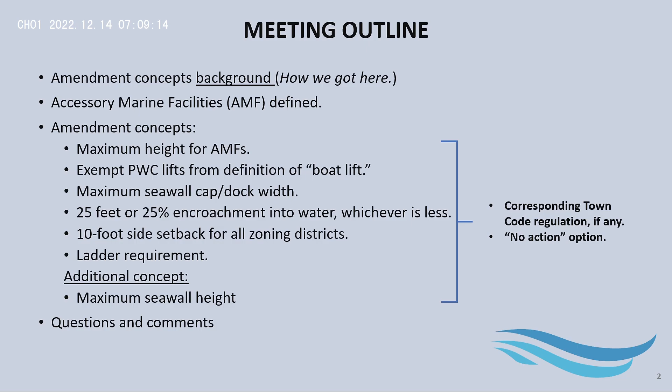All right, so here's the background. Again, this is how we got to these meetings today. So back on November 17th of 2020, the Town Commission authorized the Vice Mayor at the time, Greg Babij, to sponsor a review and propose amendments to the accessory marine facility regulations.

Now, I looked at the meeting minutes for that November 17th meeting, and Mr. Babij had indicated that both Boca Raton and Pompano Beach have clean ordinances in terms of their accessory marine facility regulations, and he also suggested that some municipalities are moving towards a box type or 3D box type concept, and I'm going to delve into this box concept a little bit later.

On March 15th of 2022, the Town Commission considered an introduction to the proposed amendment concepts. This was presented by Mr. Babij. The consensus from the Commission at this meeting was to establish a process for review to include public participation.

Now let me add, between November 17th of 2020 and March 15th of 2022, staff met with Mr. Babij. We also brought in the town's marine expert, which is ATM. We have a professional services agreement with them for marine consulting. So we had met with them to discuss these amendment concepts, to analyze them, etc.

On April 19th of 2022, the Town Commission established a process for review of amendment concepts to include the creation of maps of the various canal and lake widths. This was completed. And they also asked that the Planning Board physically observe the canal and lot widths and the existing accessory marine facilities. This was also completed. In May of this year, I actually accompanied each individual Planning Board member, those that didn't have access to a boat, on the town's marine patrol vessel.

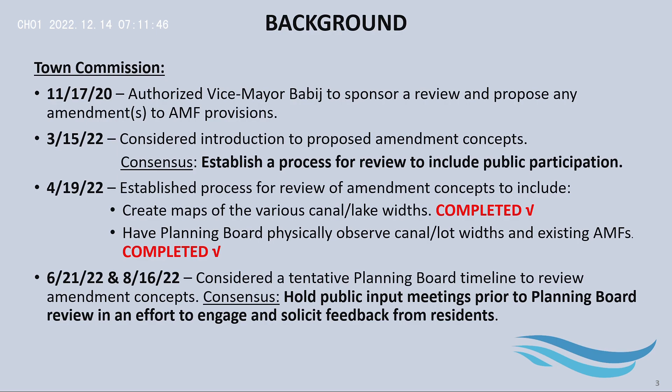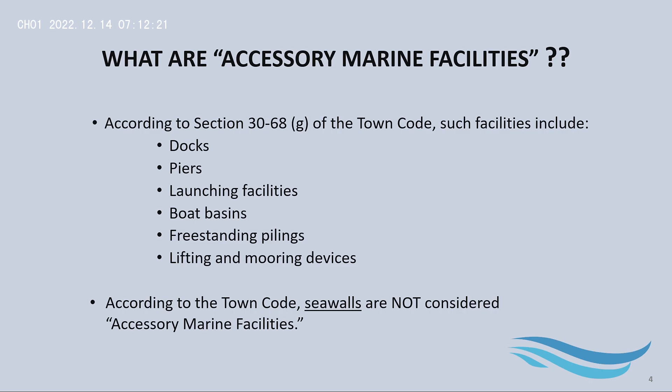Okay, definition of accessory marine facility. So section 30-68G of the code describes what an accessory marine facility is. It's a dock, a pier, a launching facility, a boat basin, a freestanding piling, or lifting and mooring devices. Now, the way the code reads right now, seawalls are not considered accessory marine facilities. The regulations for seawalls are not in this chapter 30. They're governed by chapter 6, so they're not considered accessory marine facilities as the code reads right now.

Okay, so this is our first amendment concept. And the amendment concept is a maximum height for accessory marine facilities. This is the acronym you'll keep seeing, accessory marine facility. And the proposed height is, this stands for base flood elevation plus 7 feet. Now, I've put together a little diagram here to help explain base flood elevation for those of you that are not familiar with the term.

This is a very simple diagram. So here you have the flood. This is represented by blue. The red dashed line is the base flood elevation. So we have different examples of homes here. So if your home is built below base flood elevation, you could see the risk for flooding is quite high.

And let me just give you briefly a definition of base flood elevation. It's the anticipated height of floodwaters during a 100-year flood. It's basically a 1% chance of getting flooded each year, okay? Now, if we go to the home in the middle, this home is built at base flood elevation, so you could see less risk for flooding, right? And then if your home is built above base flood elevation, obviously your risk of flooding is much lower, okay?

Now, what does the current code say about a maximum height for accessory marine facilities? It says nothing. There is no maximum height right now in the code. What the code does state is that for boat lifts, the lifts cannot be higher than the superstructure of the boat when lifted. I've bolded that definition for you. It doesn't say how high the lift can be. It doesn't give a number, right? It doesn't quantify it. But the lift cannot be higher than the superstructure of the boat.

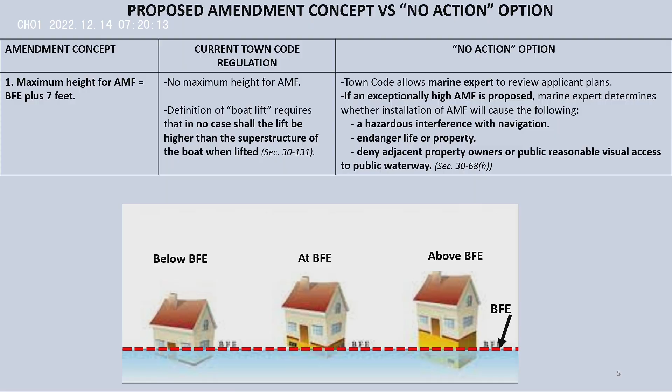So this is to exempt personal watercraft lifts from the definition of boat lift, or just remove the requirement from the code. So here's that definition of boat lift again. Again, I've bolded that part that talks about the lift can't be higher. Even though, as I said, a lot of the personal watercraft lifts that we see, they're specifically jet ski lifts, is what we've seen in the last 3 years. Even though they're a jet ski lift, they're still considered a boat lift, and they have to comply with this definition. However, a lot of the jet ski lifts have a very low profile.

So in this case, this property owner, not only do they have to go to the planning board to get an approval for the boat lift, but they went for a variance to the Board of Adjustment and Appeals. They showed a hardship, they had to comply with additional criteria, and the Board of Adjustment and Appeals did go ahead and approve it, but they had that extra hurdle, right? They had to pay an additional application fee, and they had to wait more time. So this is why we like to get your input. Should we just, again, exempt them from the lift, given the low profile, or not?

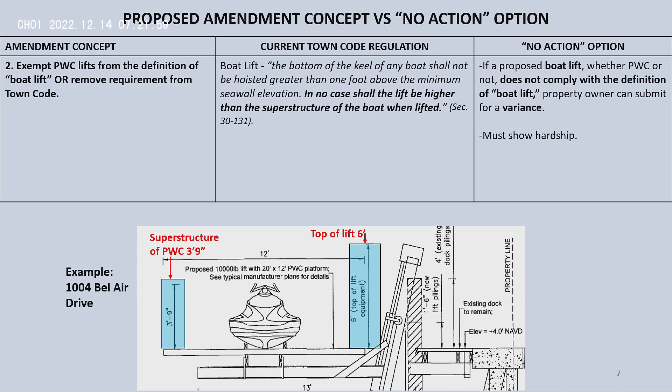The no action option, for any boat lift, whether it's a personal watercraft lift or your traditional boat lift, if you can't meet the definition, right now you have to redesign your lift or you go for a variance, which is an exception to the rule. And again, you have to show a hardship and there's other criteria.

Okay, next amendment concept, we're halfway through, is a maximum seawall width of 3 feet and a maximum seawall plus dock width at 8 feet. This is proposed to be measured from the property line. Now, what does the current code say right now? The current code says that in waterways that are regulated, and this acronym stands for the United States Army Corps of Engineers. And let me add that all the waterways, the Intracoastal Waterway, the canals, and the lakes that are within the town of Highland Beach, Army Corps of Engineers regulates all of them. We actually met with Army Corps in March of 2020, and they confirmed that that is the case. So what the regulation currently says is that if Army Corps approves it, you're good to go. That's good enough for Highland Beach.

Okay? When you propose or want to install a boat lift, a seawall, you have to get approval from the Florida Department of Environmental Protection and the Army Corps of Engineers, just to give you a little bit of clarity there. Now, I provided here a list or a little table of the seawall widths and dock widths that we've seen come in. Again, to give you a little bit of perspective, these are as of January of 2020. So the seawall widths that have come in, you could see they're all at 3 feet in width. That's pretty common. Dock widths, we have some at 5, some at 4. We had one at 8.

Okay. Now, the no action option here. Again, if the town decides not to move forward with a maximum seawall width or dock width, and let's say we had a really wide dock come in tomorrow, out of the norm, we would go ahead and have the marine expert come in, again, make sure that that dock is consistent with the criteria. And again, as I said earlier, they would provide a report.

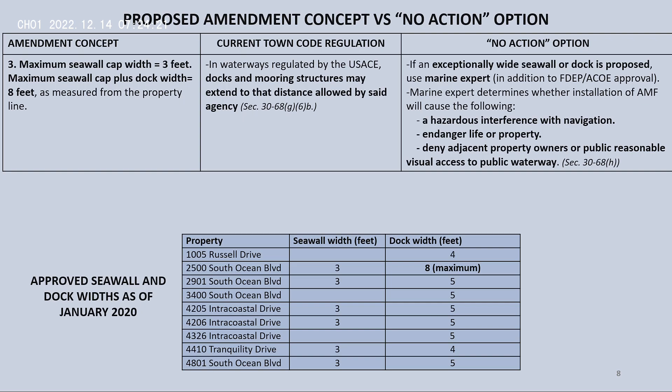Now, if we had an exceptionally wide seawall, these criteria don't apply to seawalls because these criteria are specific to accessory marine facilities, right? But that's not to say if we had a really wide seawall come in, if the marine expert felt that that wide seawall would endanger life or property or was a hazard or interference with navigation, they would have every right to document that in the report. They're the marine expert. They would make that determination.

Okay. Next amendment concept. This is that accessory marine facilities can encroach into the water 25 feet or 25% of the waterway, measured from the property line, whichever is less. And what the current code says is what it says for the previous amendment concept. So long as you have Army Corps approval, you can encroach as much as you like. Highland Beach has no further regulation. Okay? So if somebody comes in now with a boat lift, I make sure that they have the approval from Florida Department of Environmental Protection and Army Corps.

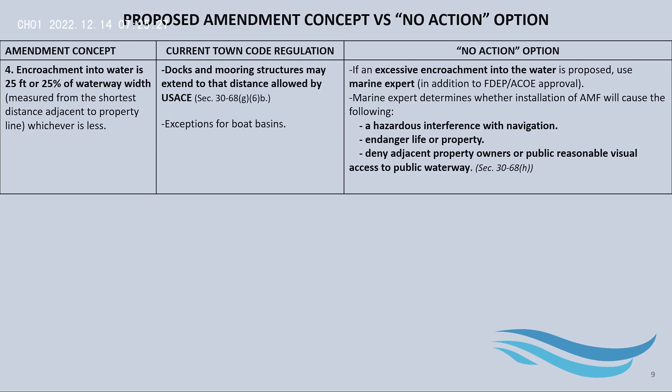If they have the approval, there's nothing else in the code for me to tell them. They have the approval. Now, I'm going to show you some maps, but let's just quickly look at the no action option. So if we don't move forward with this amendment concept, and let's say we had a boat lift and a dock come in tomorrow that's excessively encroaching into the water, marine expert, right? We bring in the marine expert, and they determine whether that boat lift is going to comply with these regulations.

Okay, let's look at some maps now. Let's look at the reality on the ground. So we're going to look here at this encroachment, 25 feet versus 25%. We're now looking at the north side of Boca Highlands. Now, I've taken a very rough measurement. All the measurements I'm going to talk about are rough measurements, so don't hold me to them. I'll be talking about and highlighting certain properties. I also want to mention all the properties that I will reference are randomly chosen, so I don't have a vendetta on anybody. Okay, so the width here of this canal is approximately 77 feet.

So 25% of 77 feet is 19.25 feet. So if this amendment concept gets adopted, and this property wanted to put another boat lift, they could only encroach 19.25 feet, because it's the lesser of the two. Now, the 25-foot measurement, I put it here just for your reference. It's right to the end of this green dot.

That's 25 feet, okay? Now, a little side note, I put a dashed circle around this boat just to give you a little bit of perspective as we move forward. This is a boat that's currently moored at this property. It's not on a lift, it's just moored. Now, the code allows boats to be moored, and the only regulation the code states is that you have to be within the property line, okay? So this boat can be as long as it wants to be. The only regulation is that they stay within the property line.

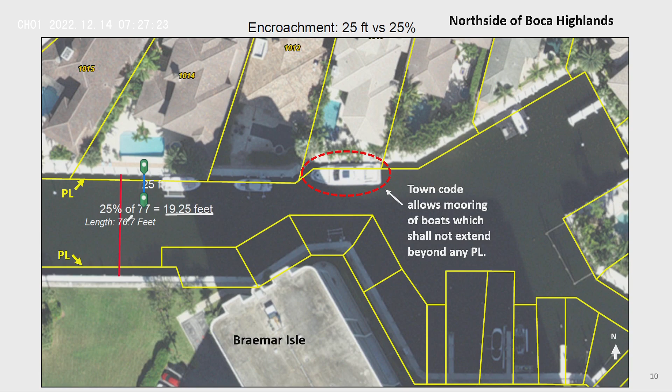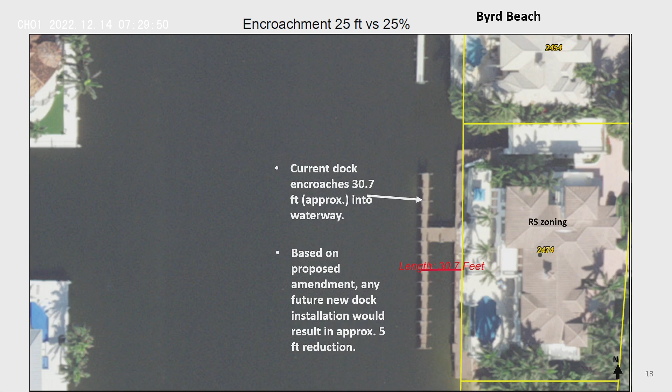If the amendment concept does get approved, do we want to exempt perpendicular docks that are along the Intracoastal Waterway? Do we want to exempt everyone on the Intracoastal Waterway from this 25 feet? The code does allow perpendicular, you can have a perpendicular dock. So we, again, would like to get your input on that.

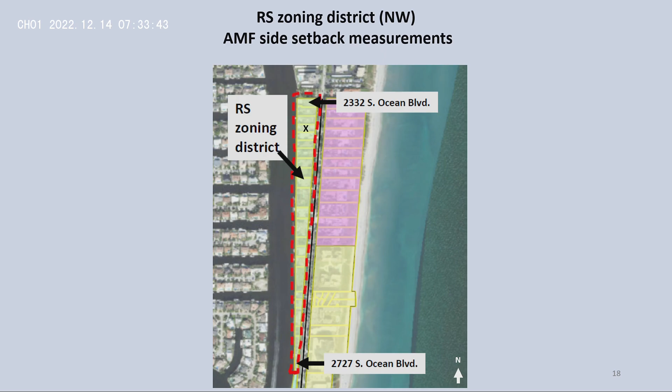All right, let's look at some setbacks. This is a residential single-family zoning district. We're going to look at this home right here, marked with an X. This is 2352 South Ocean Boulevard. Okay, so here we're looking eastward. This is their dock, okay? Now here's your north arrow. We're looking at the same dock.

We're just looking right above it. We're looking from above. Now, right now, their current side setback from the dock is approximately 21 feet. So it looks like they may be legal nonconforming because they're supposed to have 25 feet, okay? Don't hold me to it, but it looks like they may be legal nonconforming on the north. On the south, they have 28 feet, so that's conforming.

Now, if the amendment concept gets approved, their lot width is 80 feet. The amendment concept says it's 10 feet or 10% of your lot width. So 10% of 80 feet is 8 feet. So the blue line represents the 8 feet right here, okay? This is the 8 feet. So if the amendment concept gets approved, they could expand the dock to that blue line on the south and expand it to the north to that blue line right there, okay?

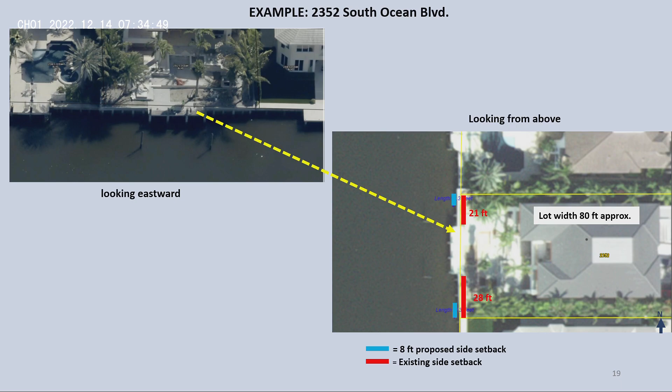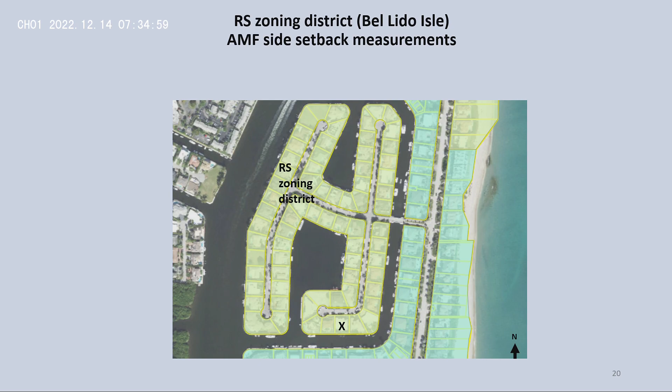Let me show you some more examples. This is also a single-family zoning district. This is Bel Lido. Right now, again, you have to have 25 feet side setback. We're going to look at this property right here on the X. So this is on the canal. This is 4426 Tranquility. We're looking northward. Here's their dock. We're still looking northward. Here's your north arrow. The lot width is 100 feet.

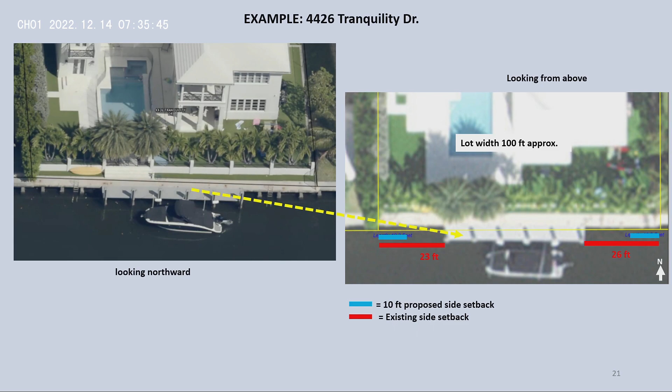So if the amendment concept gets approved, they could extend their dock to that blue line on the east side and extend it this way to the west. You can add a boat lift right here. Right now, they can't add a boat lift here. Right now, they cannot. Okay?

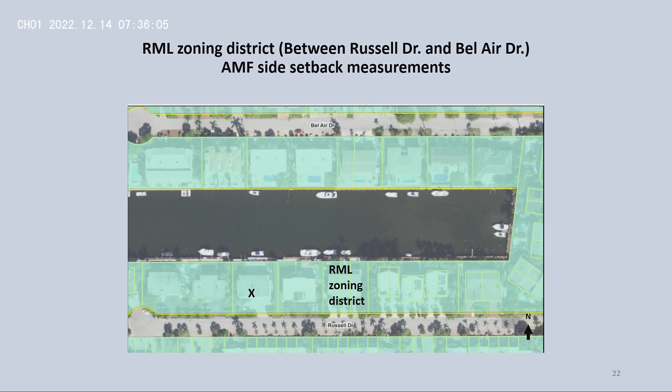Now, let's look at some multifamily zoning districts. If you recall, multifamily zoning districts, you don't have to have any side setback. But the amendment concept says you do. So let's look at that. This is the canal between Russell Drive and Bel Air. We're going to look at this property right here. This is 1019 Russell Drive. This is looking southward. This is their dock.

So right now they have 18 feet on the west side. Here's your north arrow, to give you perspective. On the east side, they have 5 feet. Now, the lot width is 100. So if the amendment concept gets approved, they're going to have to provide 10 feet on each side. On this east side, they currently have 5.

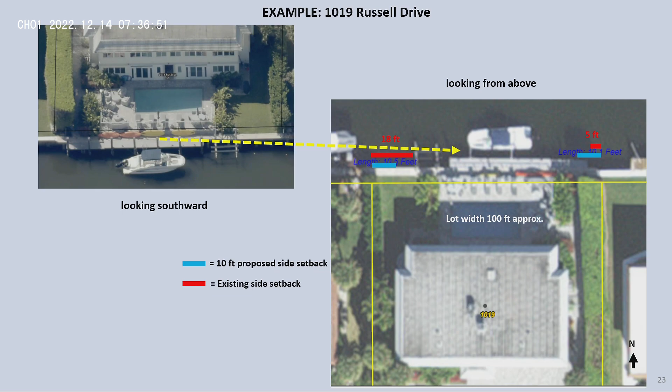So if this dock starts to fall apart, and again, the amendment concept gets approved, and they're going to install a new dock, it will have to be 5 feet shorter, right? They have to provide 10 feet. They only have 5 feet right now, so their dock would shrink. It would not be as long as it is right now, if the amendment concept is approved.

Well, guess what? If that dock falls apart and the amendment concept is approved and they want to go ahead and install a new dock, they're going to lose about 5 feet on this side and about 3 feet on this side.

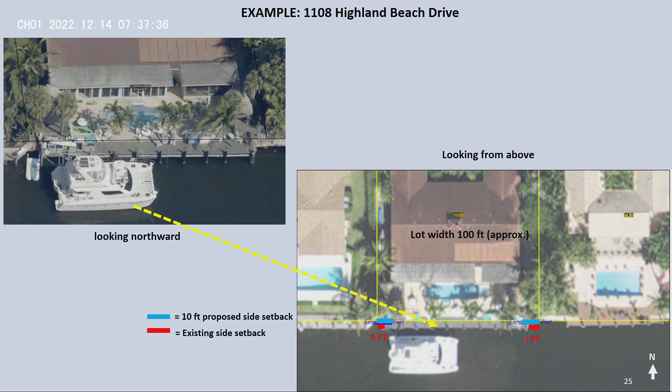Now, I have a few slides here that show the 25-foot encroachment and the side setback together. Okay, so we're looking at the Byrd Beach area. This is along the Intracoastal here. This is that northern part of the town. This is a single-family zoning district. The lot width is 100 feet. So the amendment concept says you'd have to provide a 10-foot setback.

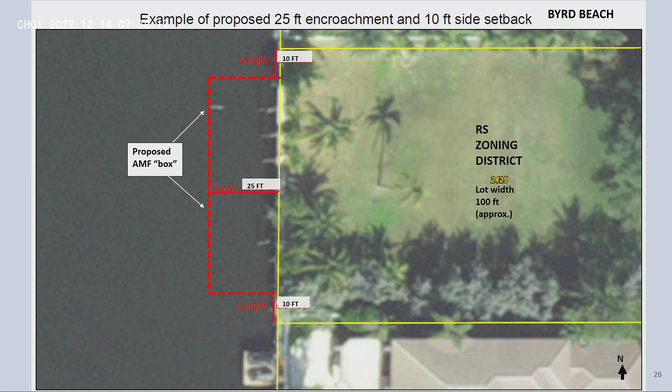Right now, it's 25 feet; it would be 10 foot on the north, 10 foot on the south, and then a 25-foot encroachment, right? Because they're on the Intracoastal, 25 feet will be the encroachment. Here's that box that I was talking about. This is the box. So within that box is where you can put your dock, your boat lifts. Okay? Let's look at another example.

This is Bel Lido Isle. This is the Intracoastal here, a single-family zoning district. The lot width is 100 feet. Based on the amendment concepts, you'd have to do a 10-foot side setback to the north and to the south. And because it's on the Intracoastal, the encroachment would be 25 feet, which is marked right here. And then the red dashed line is that box. And within that box, you could put your lift here, your dock, or what have you, another lift on this side. Again, right now, you'd have to be 25 feet on each side.

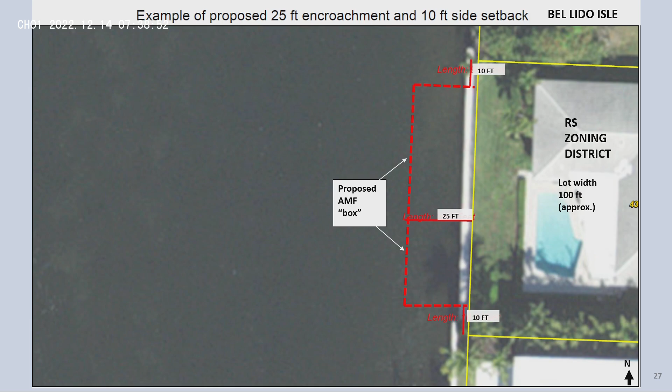And then let's look at a multifamily zoning district. Remember, multifamily right now, you don't have to have any side setback. But with the proposed amendment concept, you will. This property has a lot width of 45 feet. So the amendment concept says either 10 feet or 10%. So 10% is 4.5. However, the amendment concept says you have to have a minimum of 5 feet. So I provided the 5-foot setback here on the south. Here's your north arrow. And then 5 feet on the north.

The width of this canal is approximately 75 feet. 25% of 75 feet is 18.75 feet that you could encroach. So here's the 18.75 feet. And the red dashed line represents that box. And this is where you could put your boat lift. There's one already here. You could put maybe another one here. Okay? Yes.

Well, this one doesn't have the property line in the waterway. No. Oh. Okay. It's going to go through the box. That's true. And I think one thing what I'm seeing is you have to take into account the extended property lines. I agree with you, but just for conceptual purposes, right? Right, and again, there's so much nuance in the town, but I get what you're saying. No worries. I totally agree with you, but keep the concept, right? Right, got it. I appreciate the comment.

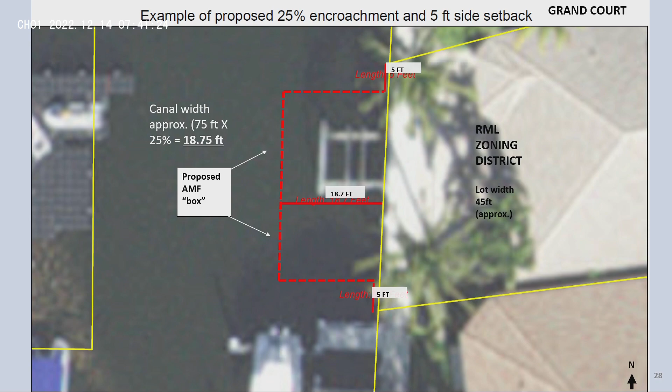Well, no, it looks like it's within the property line. Well, if it extended another foot, would that mean it can't be there? Pardon? The code doesn't give that much detail. It just says within the property line. Right. So things have to be taken on a case-by-case basis. We have properties with all kinds of interesting measurements, right? So we'd have to extend the property line, see what's going on. But again, I'm just showing you this for conceptual, but you're right. There's, as I said, a lot of nuance that we look at every day.

Okay, we have 2 more amendment concepts to go. The next one was to require a ladder for every 50 feet of dock. What does the current code say about ladders? It says nothing, okay? So instead of a no action option, what I've done here is just give you perspective. What do other municipalities' codes say about ladders? Boca Raton, if you have a dock, you need a minimum 1 ladder. If your dock is greater than 50 feet, you need 2 ladders. Manalapan and Gulf Stream, which are somewhat comparable to the town of Highland Beach, ladders are permitted on docks, they don't give you a minimum.

Delray Beach, if you have a dock, you need a minimum 1 ladder. If you have finger piers and docking facilities for 2 or more boats, you need a minimum 1 ladder. If you have 2 finger piers or more on the same property, you need a minimum 1 ladder for each finger pier. And Lighthouse Point, ladders are required for all docks, but they don't give a number. So we'd like to get your input on ladders. When we went out onto the Intracoastal and the canals and lakes with the planning board, you do see ladders on the Intracoastal and on the canals. Some areas have more than others. But again, we'd like to get your take on that.

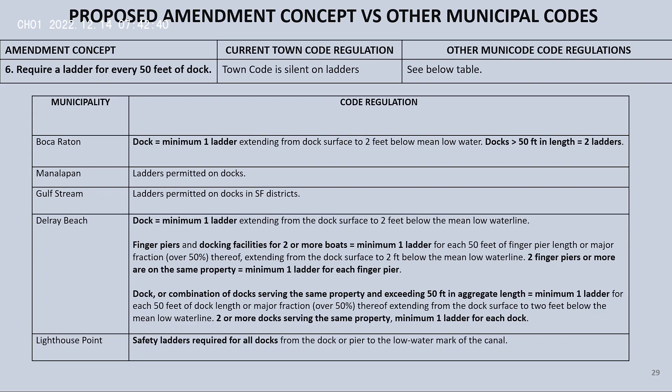Last amendment concept is a maximum seawall height, okay? What does the code say right now? The code says that all seawalls west of A1A have to be at base flood elevation or higher. So base flood elevation is 6 feet NAVD, North American Vertical Datum, as provided by the FEMA FIRM maps. As I mentioned earlier, base flood elevation is determined by FEMA. So what is the no action option? If an exceptionally high seawall was proposed, let's say tomorrow, we would bring in that marine expert, which the code allows us to bring.

Now, I try to get you a visual on seawalls. Those of you that are boaters, if you have the opportunity to go out, I recommend you look at the seawalls. This picture doesn't really do it justice, but you could see it here on the right. These pilings, you could see them very clearly, where on the left, the seawall's shorter. Again, the picture doesn't do it much justice, but you do see these varying seawall heights as you go through the canals and even on the Intracoastal.

Looking at some other municipalities, Delray Beach, they have a maximum seawall height. It's base flood elevation. Now, if your base flood elevation is 4 feet, then your seawall has to be 5 feet, so 1 foot above. North Palm Beach, their base maximum seawall height is 6 feet. It does vary by flood zone. Ocean Ridge, Boca Raton, Manalapan, I couldn't find anything in their code about a maximum seawall height, so there's nothing there.

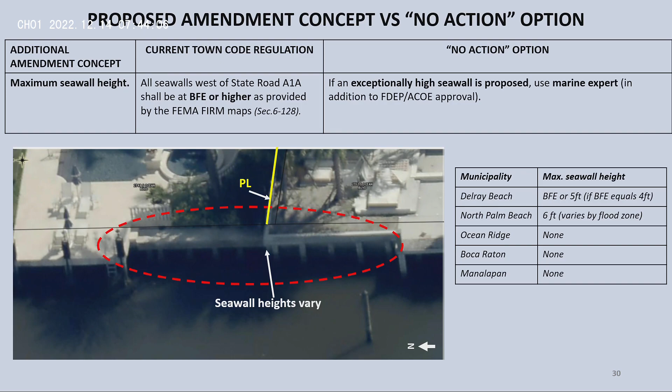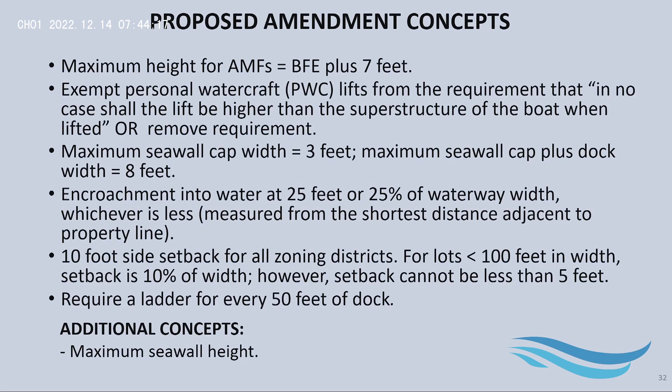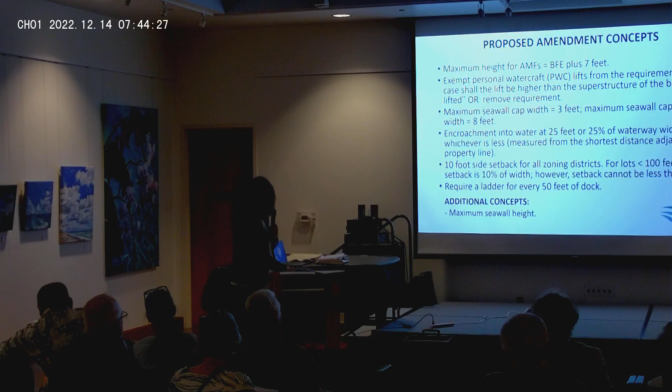All right, questions and comments. Here's my contact information. Let me go ahead and put up, these are the amendment concepts, and we can go through those. So I could take general comments. We could start with that if you'd like, and we have a microphone as well for your questions and comments. And we'll be documenting them on the pad there. Oh, yes.

I have a lot of questions, but let me just start with this one issue, which has to do with, let's call it non-permanent items like plastic or rubber floating docks and lifts. And how does that fit in? Currently, as I understand it, there are no rules regarding any of those things. Some of them are attached right up against property lines holding boats that stick out 15 feet or so into the waterway.

And to be blunt about it, without taking those items into consideration, and I haven't heard a word about it tonight or in the previous meetings, a lot of this becomes meaningless in terms of how space is managed. Now, years and years ago, these weren't a big deal. But as technology has improved, we're seeing boats now that are 30, 35 feet long or more that are on floating lifts or floating docks, and they're just attached to the seawall right up against the property lines.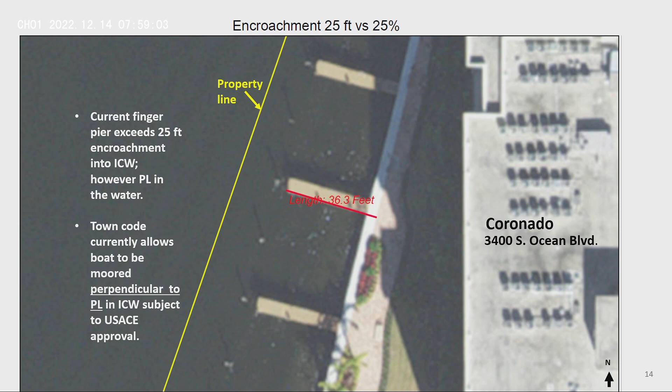Which is actually then, you're almost saying to keep things the way they are, right? No, I'm not saying that at all. I'm saying the thought of getting a variance outside my property is... Okay, it's a good point, yep. I don't know why people think they should get that. I think for the encroachment, the no action option was to bring in the marine expert, right, to make a determination.

Well, when it comes to the height of the lift, that would be a variance, right? Right. Now, the marine expert, are they structural engineers? What's the criteria for that? Yes. Actually, we did have our marine expert here at the first public input meeting. We work, as I said, with ATM. We have a professional services agreement with ATM. Dr. Michael Jenkins, he's a PhD in, I believe, coastal engineering. These are reputable firms that we deal with.

I've seen that when you codify things and rely on experts, that just gets one expert in a pissing match with another expert. That happens. That's just how things are. You get an expert, and you have another expert, and then it's the battle of the experts.

Special exceptions, I could understand it, but for getting a straight permit on something that should be relatively easy, if I want a boat lift that doesn't have the pilings, and it's just within my extended property lines, it should be able to go to permit. The code should be clear, and it should be able to be reviewed and approved, one that leans up against the dock, and the height limit you have. We don't have a height limit right now. I know you don't. The one you're proposing. We're only talking about what you're proposing, because something's going to change.

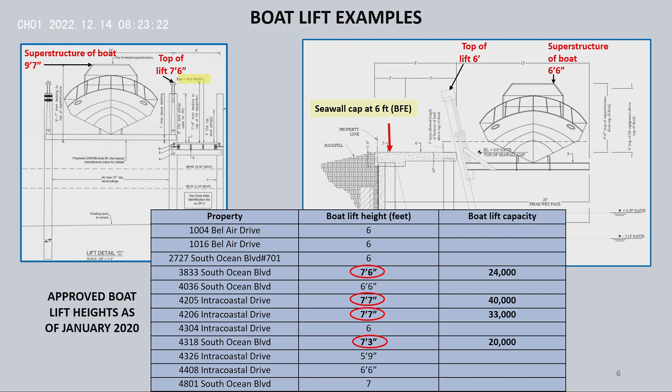Again, I'll be happy to give you the breakdown if you so wish, yeah. Any other comments? Sure, let me get you the mic. Yes, please write your comments. We would absolutely appreciate it.

You went back and, you know, I think the town makes their job a little bit harder than they have to. Currently, I guess you were saying there's different setbacks depending, and if you go back to that slide, I think it's slide 19 you were talking about that. That's when I wrote it down. It might have been earlier. There it is. Okay. These are the current setbacks, only for single-family zone districts. Right, and then you have no setbacks for multifamily.

Correct. Which, you know, I think it should be standard, the same for both and all, make it all easy. And everybody has the same rights when it comes down to it, whether it's one piece of property or another, and everybody stays off the same side. It might be a utopian point of view, but it certainly makes it easier for code enforcement when you're sending them out there, not to waste their time. It's 5 feet, or if it's 10 feet, whatever the setback number is.

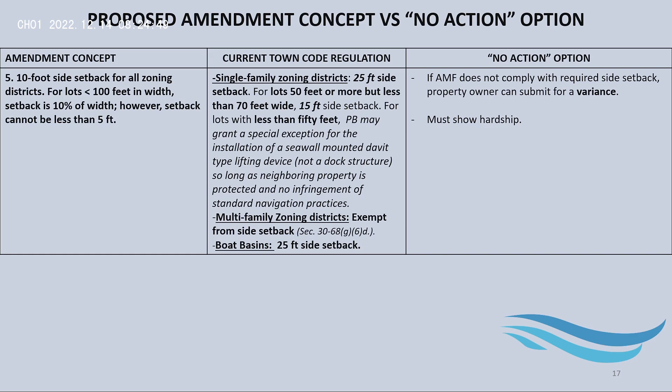So it's just done. And a new boat coming in, you know, the neighbor complains and it's too close to the property line. He just got the boat. Well, you can check registrations. You can do a lot of different things to solve your problem between neighbors. When it's different setbacks on one side versus the other, because you had one was 8 feet on one side and 7 feet, right, because it was based on the lot width. That's how the amendment concept is, yeah.

Which really makes it difficult for you guys to do your job, and the homeowner when he's buying the house to know what his rules are, or a vacant lot or whatever he's doing. So it's just easier to standardize as much stuff as you can through this process. I'd support that in a heartbeat because it makes it easier for the town. You don't get accused of being arbitrary and capricious when you give one person something that somebody else can't get. That's pretty much all I have. Thank you.

The setbacks, that's for each lot, because their properties are within the lot. Condos divided, now those have to have a zero setback, right? Two condos next to each other in the same property, there has to remain zero setback. You cannot put the entry only at the end of each lot. Is that correct? Correct. Okay. That's what I'm saying.

Currently, I'm on Russell Drive, so on both sides of the street, you have Boca Cove on one side, and the other side is townhome buildings, right? 3 units, 2 units, whatever. The docks continue down the whole street. In between the buildings and everything, it's continuous dock. So what you're proposing, at each property line the dock would have to stop, so there is going to be a gap from each building? Well, I think you already have docks there, right, but it's continuous. Yes. So again, that's a little nuance.

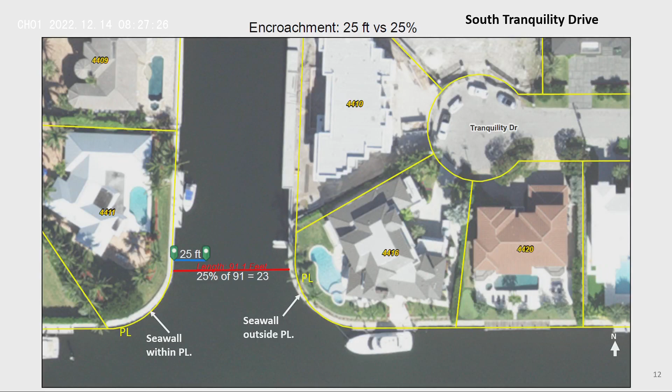Like, this is Russell here. You're talking about these? Right. So yeah, that whole side is a continuous dock all the way, and then the other side of the street, on the bottom side of the slide, is... Oh, down here? Yep, that's the Boca Cove community, and that is one community, all the same buildings, right? And it's one continuous dock.

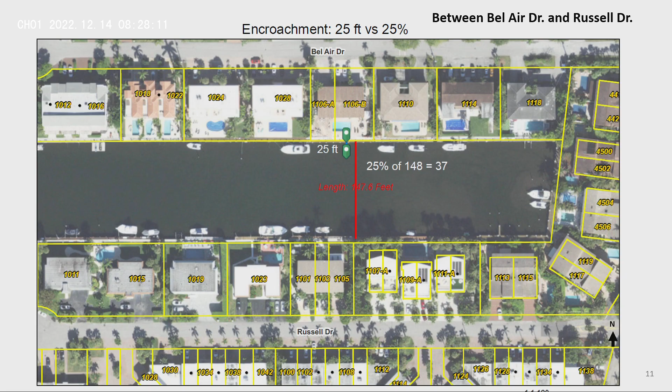So like where you see 1100 and 1102, you're saying the dock would have to stop there? There's a current dock there, right? Yeah, because we went down that canal, and I was told by one of the planning board members that their HOA doesn't allow boat lifts. All the boats there are all moored. Right. So if the dock's falling apart and they need to put a new one in, if the amendment concept gets approved, then they would have to meet the setback. So that community would not have a continuous dock.

This right here looks like it's... is that the wrong canal? Let me see if I have one. You're talking about the one to the south. It's not all one building, because these lot widths are very, very narrow. There's different, like it does separate in places. I don't think I have a visual of that. Right. So that wouldn't make sense. I encourage you to fill out the comment sheet. I'd love to get more detail. I see what you're saying, though.

Right. I think you have to be mindful of that. We have some condos that have, I guess they're a marina, where they have a dock and then they have the slips. Those were built many years ago. But these here... Yeah, they may not be able to do it without an HOA.